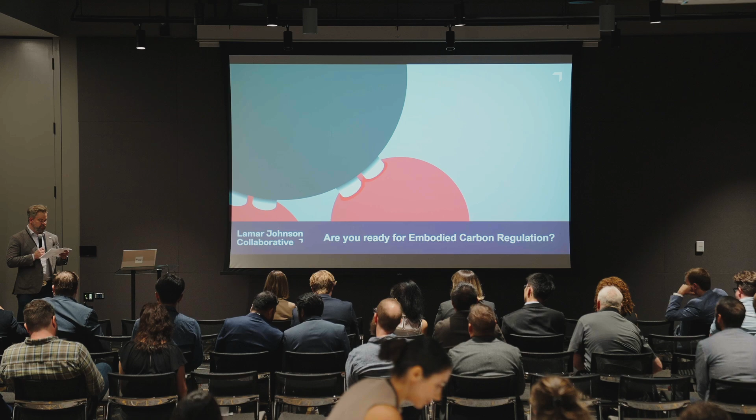I'm really excited to be here. My background is structural engineering, so I'm definitely very intimidated by all the energy modelers out here, but I also help lead a group that does energy modeling, so learning a lot as we go.

I'll also give props to what Katie and Brian talked about. I'm the chair of the Green Building Council in Kansas City, and we also have an energy resource hub there, and I know that they interact quite a bit. It's been awesome in Kansas City to partner up with what's been going on in Illinois, so it's really cool.

So my background is structural engineering. I worked here in Chicago for a while for the Steel Institute, and I've worked at design firms as well as general contractors before starting this role as Director of Sustainable Structures for LJC Clayco.

I think I'm part of a pair here where we're doing a shorter presentation and then a panel. So I'm briefly going to talk about what's coming up for embodied carbon, where are we now?

If you haven't been able to grasp embodied versus operational carbon, essentially operational carbon is what's going on here right now with the lights and the HVAC and everything. For the last 20-ish years of the green building evolution, most everybody was focused on that aspect, like how efficient are our buildings operating, and legitimately so, it's a large source of energy and carbon.

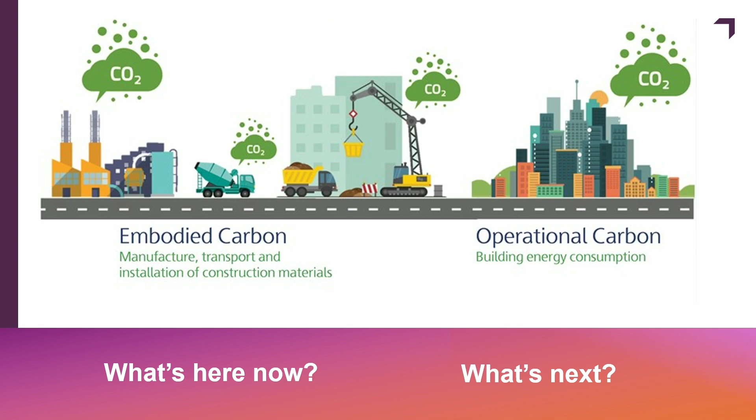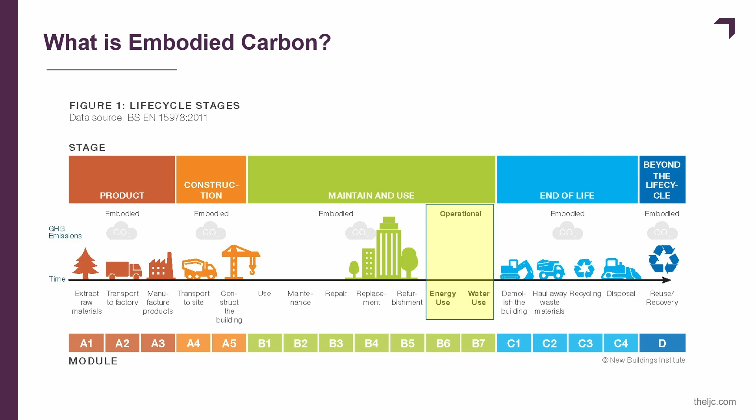So with anything else, when you start talking about embodied carbon, there's vocabulary to go along with it. Not to get too crazy into the weeds, but essentially, like my last slide, the last 20 years or so of the green building evolution has been focused on what somebody who does a whole building life cycle analysis would call B6, B7, like the use of the building. And so I live over here, as a structural engineer, I live here in this world of A1 to A3.

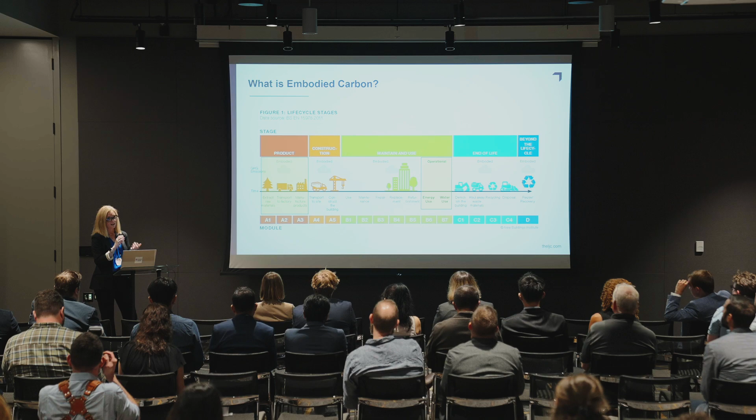What happens when we recycle metal, make steel beams? What happens when we take cement out of concrete, do all those things? So where can we be creative? There's several ways to tackle this, right? We can tackle it with smart design, and we can tackle it material science-wise.

I know probably this group is no stranger to the fact that roughly 40% of our emissions globally are from construction, building related, and roughly 11-13% are from materials.

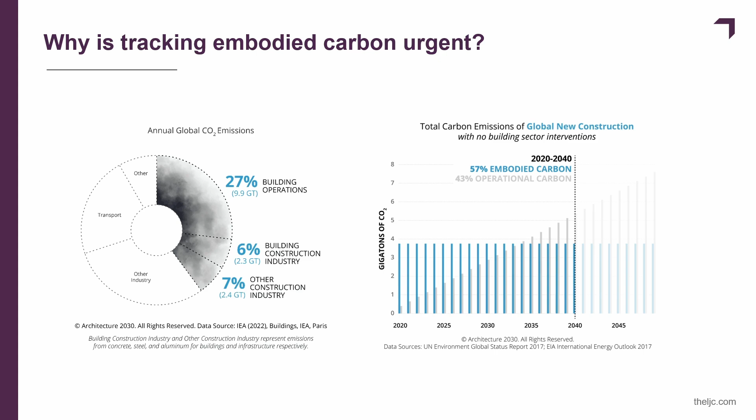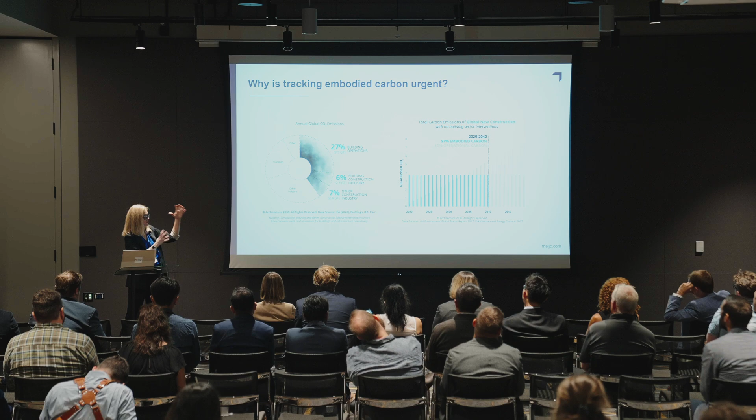Essentially, people have been saying, okay, embodied carbon is really urgent to tackle, because when a building is built, it comes with its embodied carbon. Like, this concrete is here. And maybe 20 years down the line, there's a renovation and it bumps up a little bit. But as operational carbon grows over the life of the building, that carbon is here now. So arguably it's being put in place faster.

And we've all seen the slides as well about building a New York City every month. So it is something important.

I like to tell the anecdote that I was at Greenbuild like 4 or 5 years ago in a session where they were talking about embodied carbon, and they said, we need a structural engineer, we need somebody who knows what they're talking about here. And so a couple of structural engineers and I were talking, we're like, when did the structural engineers become the cool people in the room? Because we're not. So it's been an interesting time.

So again, why is structure important? Why are we talking about this? This is from the Buy Clean Colorado Act, and this holds true with the embodied carbon studies that I've run. This would be like a steel framed office building.

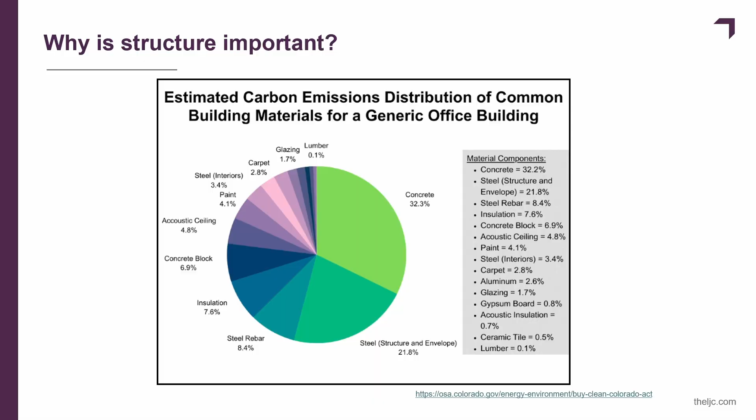Entirely steel framed metal deck, just concrete slab on deck. So you can see even with just the concrete slab on deck fill, that's a pretty large chunk of the concrete, and then steel is after that. But kind of rough rules are like for new construction, depending on the type of building, like parking garage might be different, but usually embodied carbon is 80%-ish from the structure.

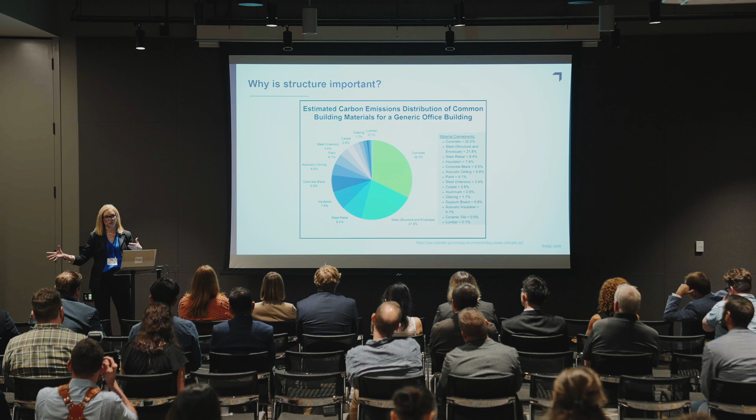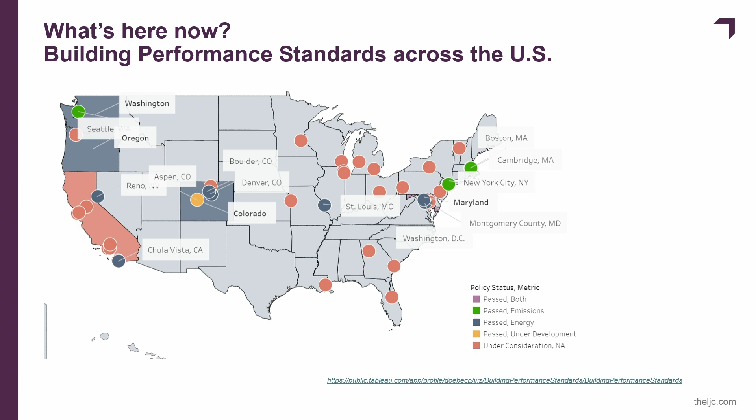So then kind of going with what's here now, what's coming up, similar to what we talked about earlier, here's a map of building performance standards in the US. And where I am in Kansas City, we're under consideration, just like you guys, we're working on it.

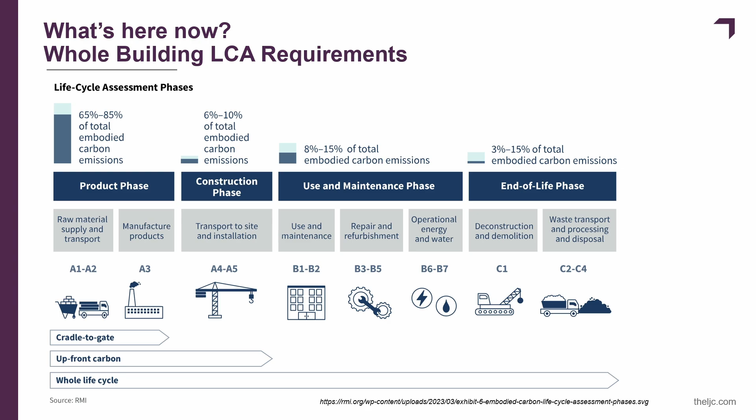What is here now is whole building LCA requirements. States like California have Cal Green, the new law that went into effect July 1. Any building over 100,000 square feet has to complete a whole building LCA, which goes through end of life, which a lot of times our best data is up here in raw material supply, and some of these other factors wind up being multipliers.

But I also really like this graph from the Rocky Mountain Institute because it gives these average factors for embodied carbon, from the environmental product declarations that I've looked at. This is pretty true - the ones I've seen that go through end of life, yes, still the lion's share of everything is up front.

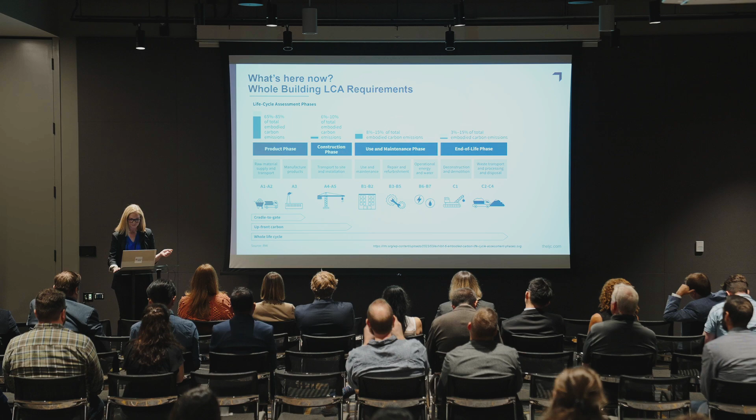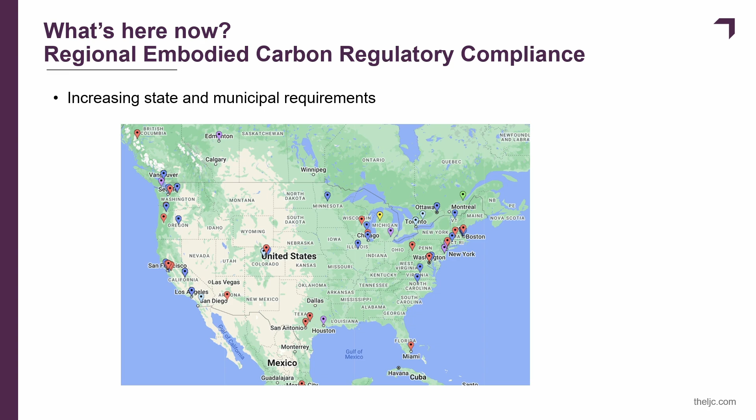So there are regional embodied carbon regulatory compliance as well. I think Marin County in California was one of the first ones. There's a Buy Clean Colorado. Minnesota has one. They're popping up all over. We don't have one in Kansas City yet, but we're still working on getting the energy code and the performance standard right, so we'll get there.

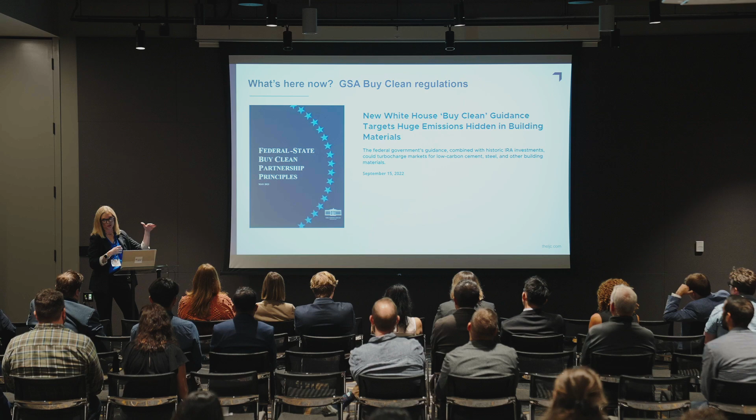We do have GSA Buy Clean regulations, so if you're working on a project getting funding through the IRA or the BIL, a lot of that material is subject to embodied carbon regulation, where you have to submit an environmental product declaration saying my steel is below X and my concrete is below X. So it's been great. There's actually a couple architects who work for the GSA and specialize in this in Kansas City with me, so I get to pick their brains about it once in a while.

And then this is some of the Cal Green provisions as well. So the confusing part is when it says tier 1, tier 2 - essentially this is what's in effect now, and then tier 1 and tier 2 are what they're going to step down to over the next couple years.

Really for concrete and a lot of other materials right now, as of July 1, these thresholds are set at 175% of industry average, which is pretty generous. They're really baby stepping into it, taking out the worst offenders type thing. I actually just interviewed for a project yesterday in California and said, yes, we have no problem meeting this for the job in California. A few years down the line, we'll have to look more specific.

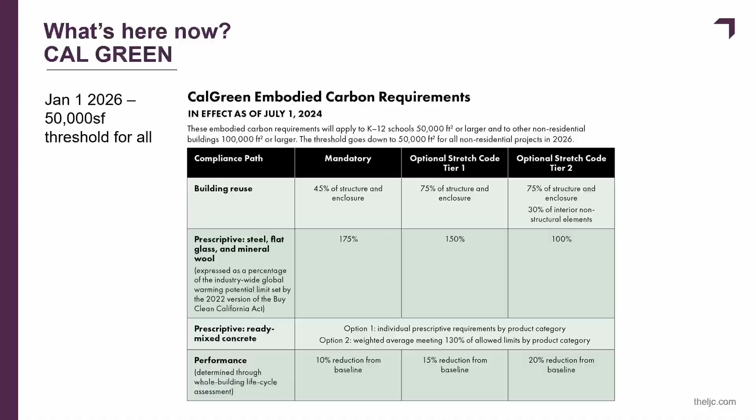So I was lucky enough to participate in the SE 2050, and the SEI Institute had a convening in July in Boston where they were trying to map out what is the path to net zero for structural engineering. And I would say the breakout we had on deconstruction and material reuse was probably the most energized one.

So one to watch is San Antonio - they have a deconstruction ordinance in place. I mean, you can imagine if a city the size of Chicago said you cannot demolish anything anymore, it has to be taken apart like a kit of parts and documented. I know there are size thresholds that go along with that, but I think Vancouver in Canada also has a deconstruction ordinance.

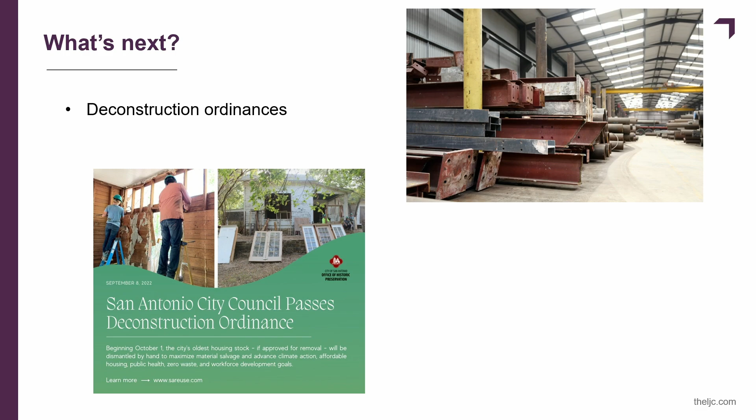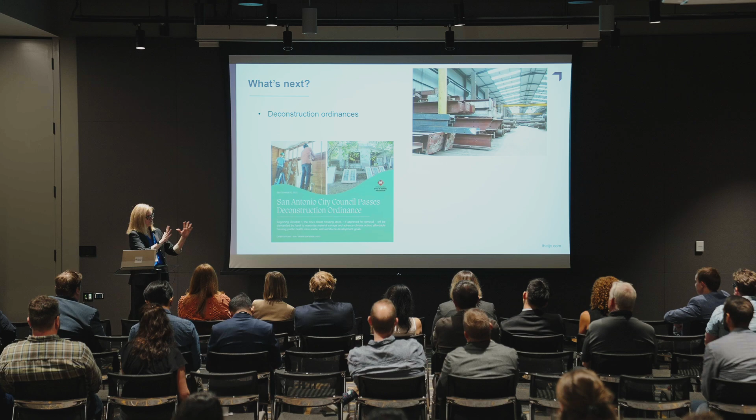And we used to talk about this when I worked for the steel industry as well - you have steel from a mill, but then you also have service centers, which are kind of the Home Depot lumberyard of steel. And there could be the Honda pre-certified used lot of this, but how do we de-risk that for engineers?

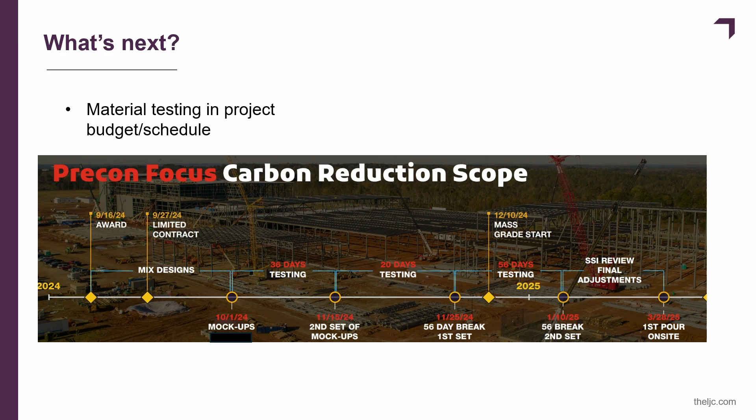What is next? Building testing into project budgets and schedules. So Clayco, Lamar Johnson does a lot of industrial, large data center type work. I do have some slides at the end, about how we are starting to do way more testing for clients.

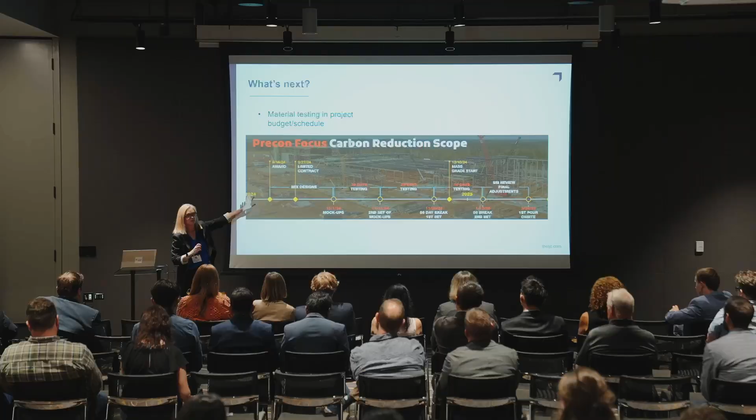And starting to build it into our projects and schedules. So when we are awarded a job, this would be for California, our concrete contractor and ready mix supplier says, we feel comfortable with these mixes. If you want to really dial it in, we need to do some testing before throwing these mixes on a 1.5 million square foot warehouse. So allocating $100,000, $200,000 to doing some testing can be done on some of these larger projects.

As well as it can also be done cheaply. We've done projects where for a large data center, we're putting up a lunch tent on site for the workers there. So that slab for the lunch tent is our test slab for the low carbon mixes.

Also, what's next, and this is something that's come up in the UK recently, kind of getting to that used material side. So if I'm a structural engineer - actually my license is in Illinois now that I think about it, because this is where I lived when I got it - but if I want to take this used steel beam and use it in my building, I am probably taking on a decent amount of liability from the building code itself.

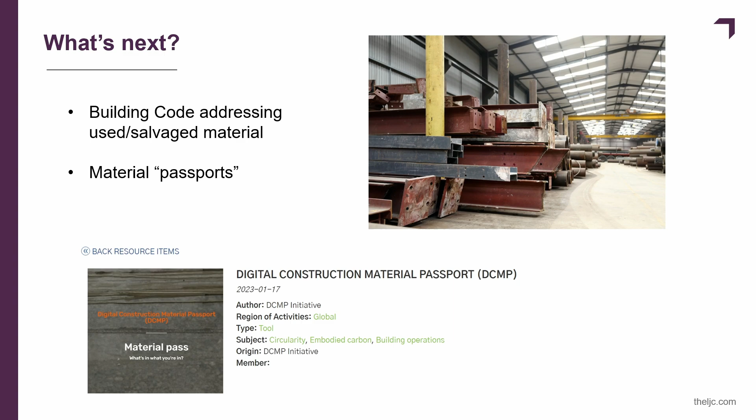So how do we go about saying, yes, this lot of steel over here is good to be reused? What are the full cadre of ASTM tests I need to run on this thing in order to feel confident about it? So I think that's going to be something that's a hot topic the next few years.

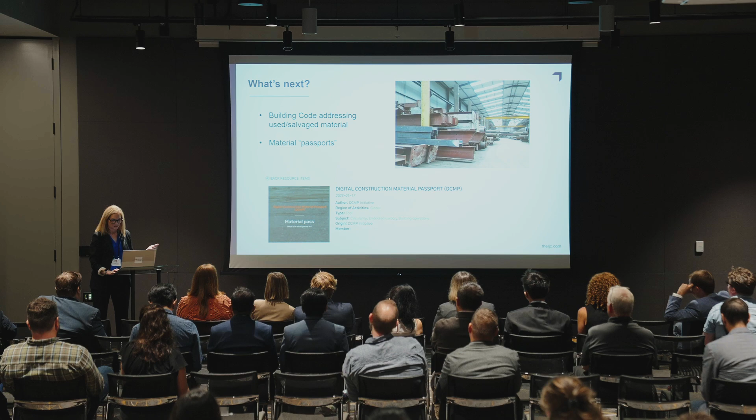And then, this is some of the testing that we did last November. This was for a data center client of ours. They essentially said, there are all these really innovative concrete products out there that you see, right? All these low carbon aggregates, all these things. But what's available to us now, what's available at scale that we can actually use and not chip away 10, 20% at our carbon footprint, but what's going to get us to the 40, 50, 60% that are in our corporate goals.

So Clayco has a really robust concrete strategies group, and they have pages and pages of quality data requirements. They're very strict about, before we put this mix on, we've got to look at the aggregate, we've got to look at this. So similar to what I said, we've got a test yard in St. Louis, let's build some of this stuff.

So these were all the groups involved. Ozinga here in Chicago, and it's kind of notable that Kienstra is a big ready mix supplier in St. Louis - they're direct competitors, so they were both helping on this. We worked a little bit with Breakthrough Energy and ClimateWorks as well.

So we essentially said, we're going to benchmark these. And whenever somebody says, oh, you need a 30% reduction from your concrete, it's really important to ask versus what, because there are a lot of different benchmarks out there. The NRMCA is the National Ready Mix Concrete Association. They have benchmarks from 2020, which are pretty generous, and then they have a newer set of benchmarks from 2023, which are a good 30% lower. So depending on where you are, you've got to read your spec and ask what are you asking me to benchmark to?

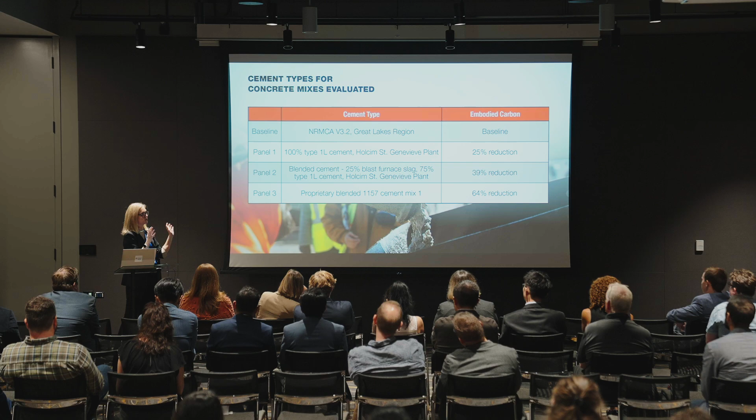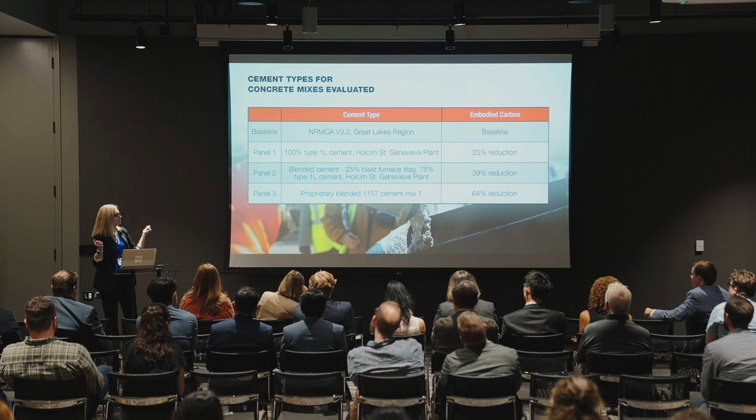So we did our base, and this was interesting in itself - it was 100% type 1L cement. 1L is the newer mix that has up to maybe 12% limestone in it. That mix itself was actually a 25% reduction from the regional baseline because this St. Genevieve, Missouri plant is actually one of the most efficient in the US. So regardless of anything else, different cement plants operate differently.

And then panel 2 was a 25% blast furnace slag, and then panel 3 was a proprietary mix from Ozinga, which was going to be about a 64% reduction. But it's one of the bigger ones that, while it's newer, you can get it at scale.

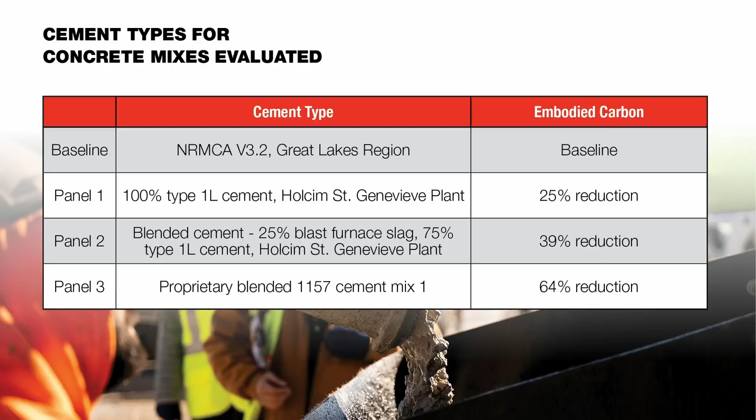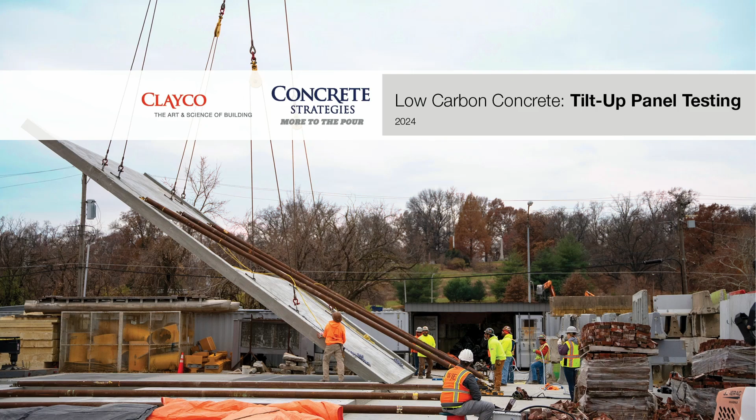In addition to just saying we can cast this stuff, for tilt wall construction, going back to this picture - it's kind of like having a post-tension slab where, per the schedule, we say we're going to cast this, we're going to tilt it. Most aggressive would be like 3 days, sometimes it's 5 or 7, and it doesn't have to be full strength by then. There's all these different thresholds, but usually you want 50% strength by the time you're tilting it.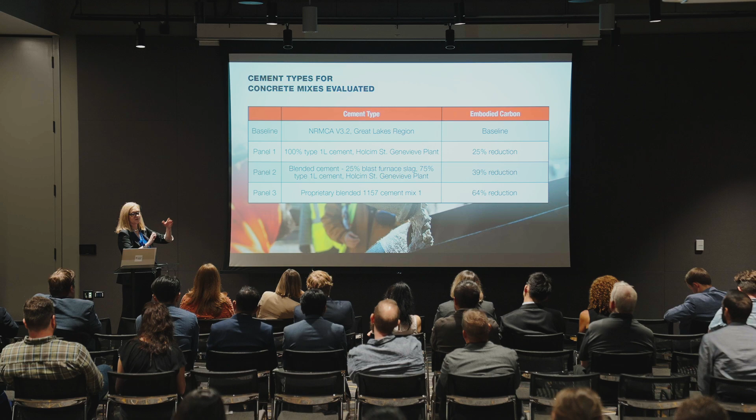So we wanted to hit strength on time, but we also wanted to make sure the guys in the field who are pumping, placing, and finishing it can work with these mixes, because they're different and stickier and you're playing with a lot of different things. So that 1157 is not a brand name, it's an ASTM spec - ASTM C1157 - which opens the door wider for what you can put in cement.

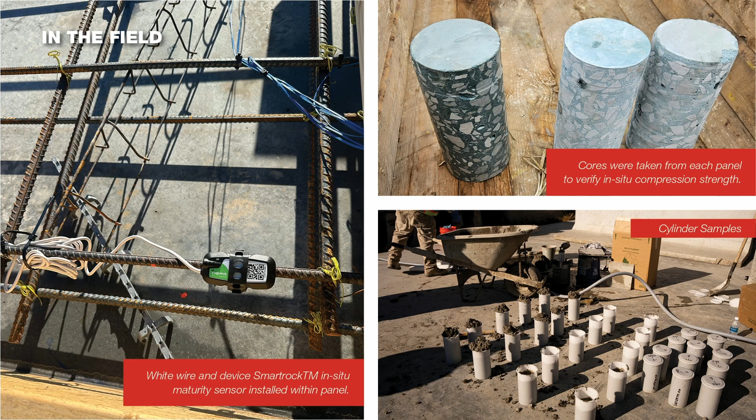But because of those set times, a lot of low carbon mixes will slow down strength gain. So now at least we have a mix where the client knows okay, we can do this 25% substitution even in the coldest of weather, and we're going to be good to go.

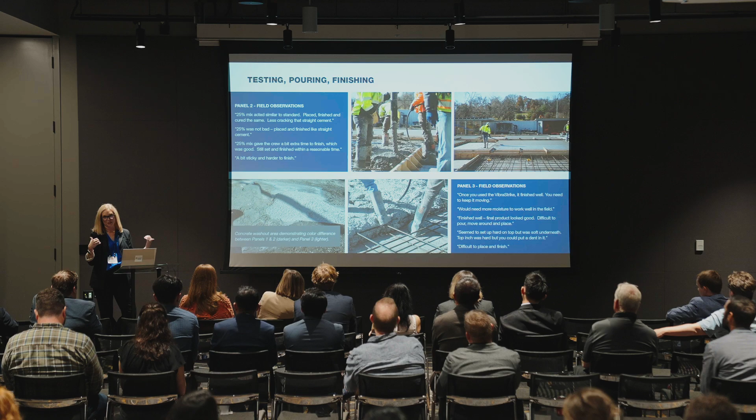And then this was for panel 3 - you can actually see the color difference between them. It finished beautifully, but it was harder to pump out. It took a couple trucks to get the moisture and all that stuff right. When they say once you use the VibraStrike it would come out - it was kind of sticky, you had to put this little vibrating machine in it and then it would move around and you could place it. So in addition to carbon and strength, you've got to be able to work with this stuff in the field, because something like that will kill a good idea just as fast as anything else.

So we're just starting - actually we just finished the second round of testing last year with that same client down near Atlanta, testing an ingredient called calcined clay, which is pretty neat. So we're trying to be aggressive about working with these clients on projects where we have the time to really dial in some of these mixes.

I'll say, to translate some of the carbon reduction, when we present to clients there's an EPA greenhouse gas equivalencies calculator that you guys probably use in energy modeling, where you can say you're saving 1 million kilograms of carbon and it's equivalent to XYZ.

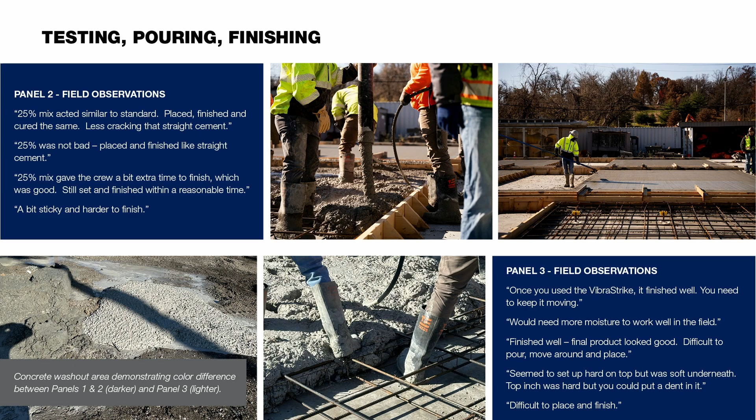So yesterday when we presented in California, we were presenting a 20% reduction as a minimum, saying here's a couple things we can do to get you to 30. But even that 20% was, I want to say, 11 million kilograms, which was equivalent to 3 wind turbines running for a year. So it's significant - there's significant savings there. We as structural engineers just have to be able to speak to it.

So essentially to finish up, what can you guys do? Make sure you're asking your clients up front what their carbon reduction goals are. We approach a lot of interviews by doing our research on their website - this person has this carbon goal, how can we match up with that? Ask your vendors for the environmental product declarations. Can we help you do testing? Do you have time to have us help you dial in some of these mixes? Get to know your concrete suppliers - it's pretty interesting to tour a steel mill or a concrete plant.

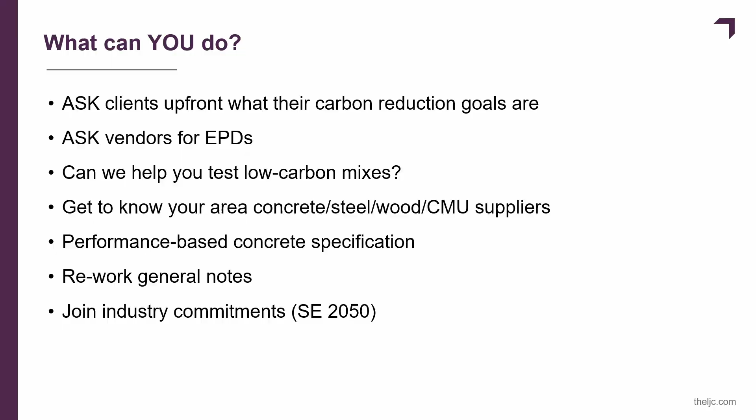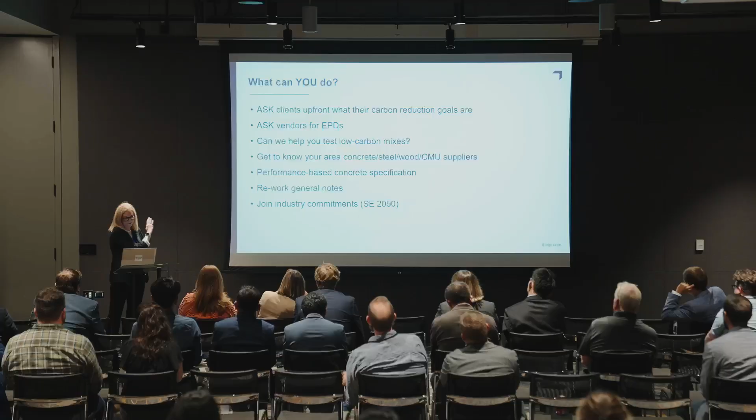Performance-based specifications - I love the theme for Wild Wild West today because I've been saying that for a year on the embodied carbon side of things. It's a little bit of the Wild Wild West because ASHRAE has this lovely chart that says here's your building type and here's your baseline system, and that does not exist for embodied carbon. So we're trying to figure out the best path we can. And if you are a structural engineer, I had like 5 more slides about put these things in your general notes, but you guys don't need to hear all that.

So I think that's all. That's all I have, so thank you so much.